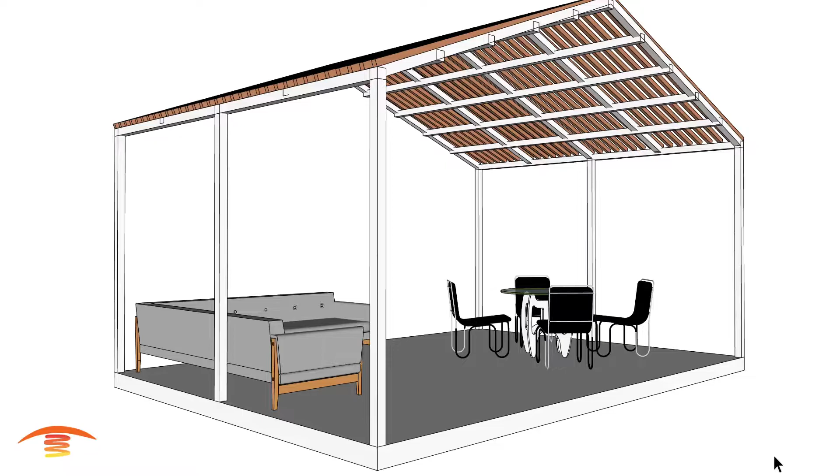Hi, this is Steve with Tropic Heating and PatioHeat.com, providing you with the visual concept of infrared patio heating. We specialize in sales, service, and designs for residential and commercial applications.

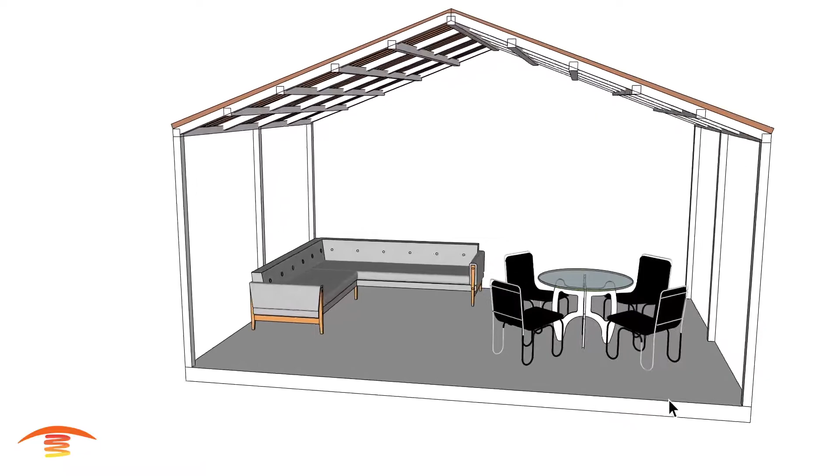Thank you. All right, so here's a standalone structure. This is a residential application. The only thing we have to really think about here is the fact that we have a wooden lattice up here. This is all steel frame, and as far as the seating goes, I just haphazardly placed a large sectional couch here and a table here for dining of 4.

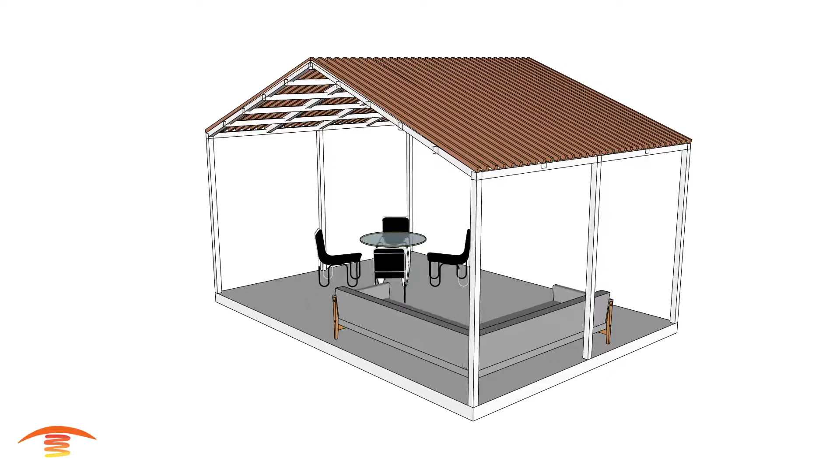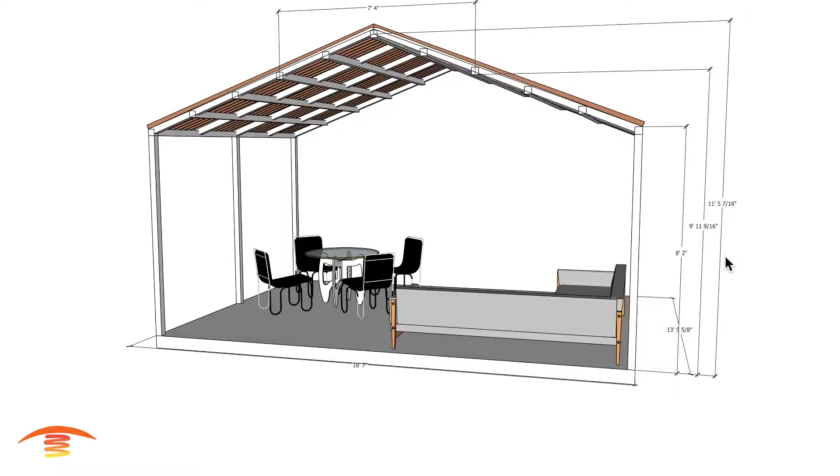All right, so let's go ahead and look at the overall dimensions. The dimensions here are 18 foot 7 inches this direction, and then a depth here of 13 foot 5 5/8. I have a height of the bottom edge here at 8'2", and then ceiling apex here of 11 foot, I believe that's 5 3/16, or 7/16 rather.

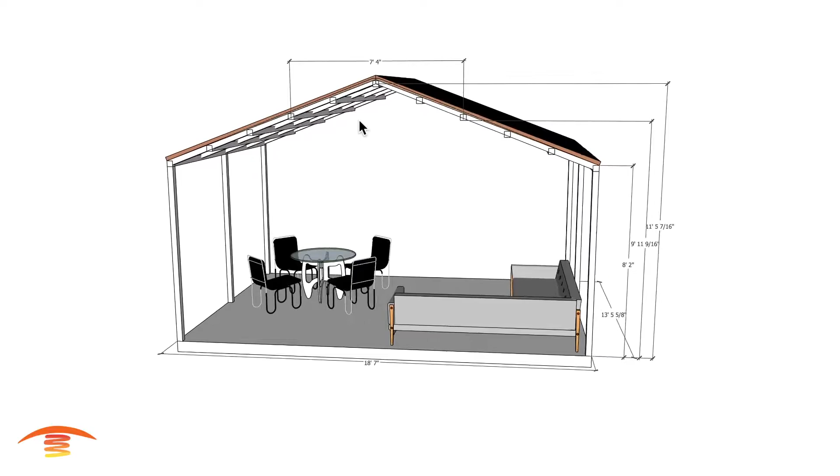And then I'm going to choose to mount on this particular truss here, I guess you would call it, and that is at 9'11". And also you can see here that those two outside matching trusses are at 7 foot 4 inches from center to center. All right, so let's go back here.

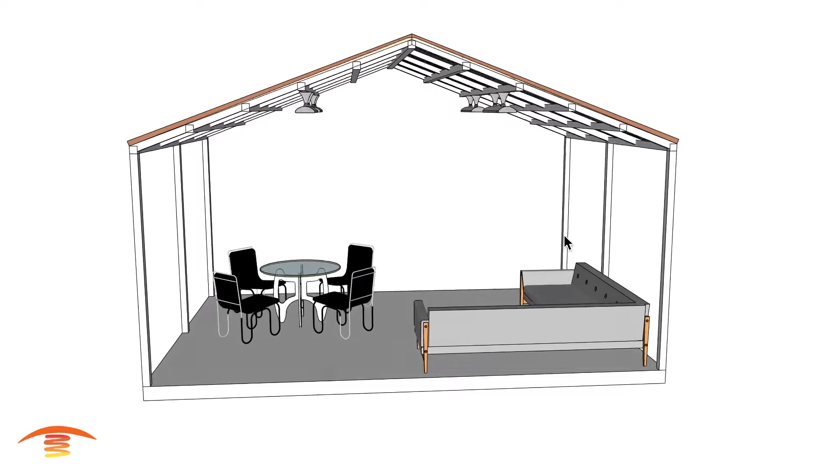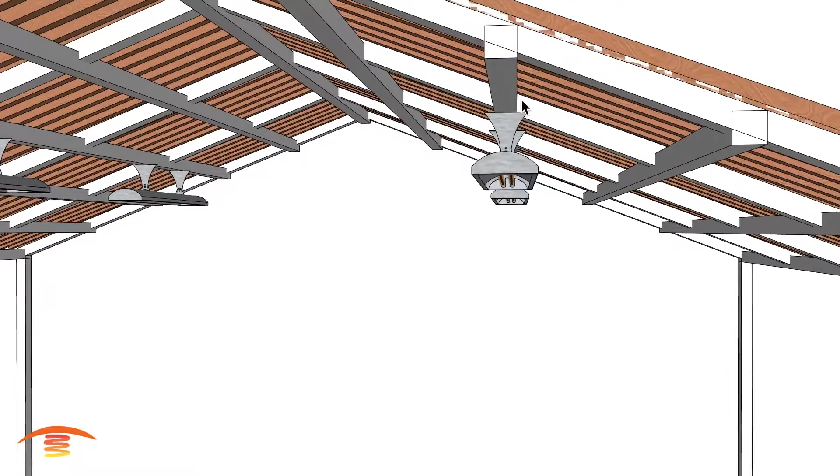I'm gonna have two different options. Option number 1 will be my preferred option. These are CD5024, so 5,000 watt 240 volt heaters, and you can see there's dual elements in them. I just have them mounted on this 3-inch square tube, and you could just manufacture your own type of bracket here. I know that this customer actually has some brackets on their drawing that would

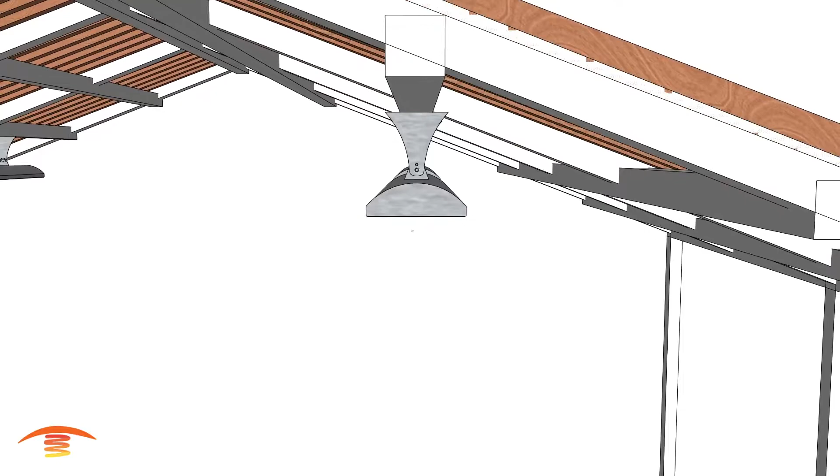be just a 90-degree, and then they could be mounted onto this portion here and then just drop down that 6 inches. Also, just to note that this bracket maintains a 6-inch clearance from this elevation, where the physical clearance is really 3 inches around, so you could actually make the bracket a little bit shorter.

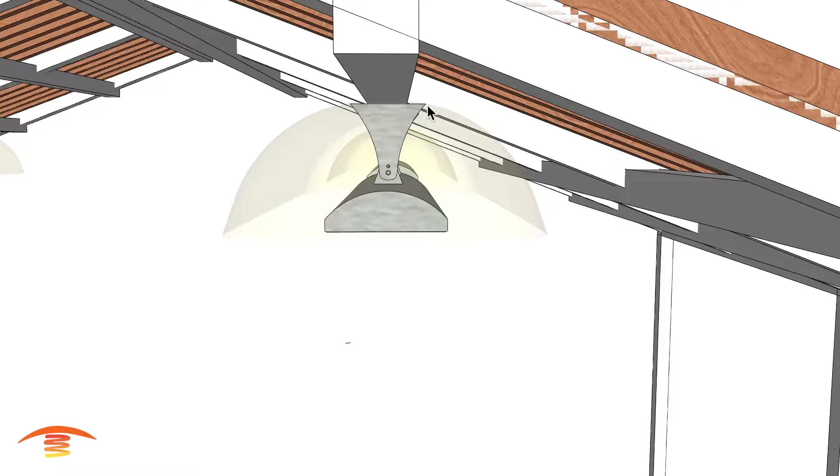Now there is a junction box back here, so you can't push them up too much higher, otherwise you're not going to get access to that junction box. But definitely either cutting this existing bracket, or making your own to match up with this 3-inch dimension here would be preferable in my view.

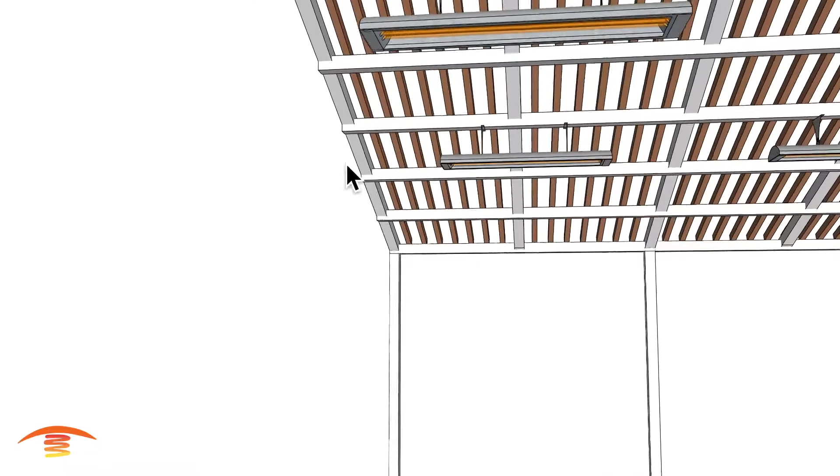And then also I have this edge of the heater at 2 feet off of this edge of the structure, and then same with this, 2 feet from this edge to this edge of the heater. And then of course just on these two structural beams here.

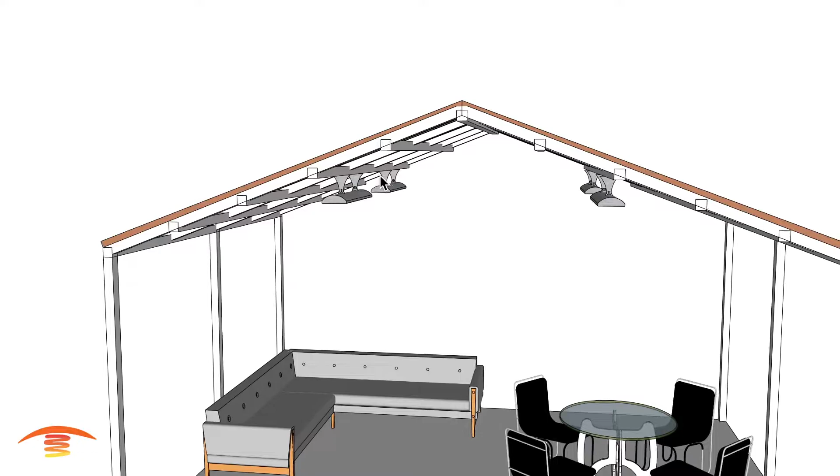Now these heaters are 18 pounds a piece. Actually, these are a little bit lighter than that. I think they're like 14 pounds a piece. So mounting on this shouldn't be a big issue with regards to the structural integrity. Just keep that in mind.

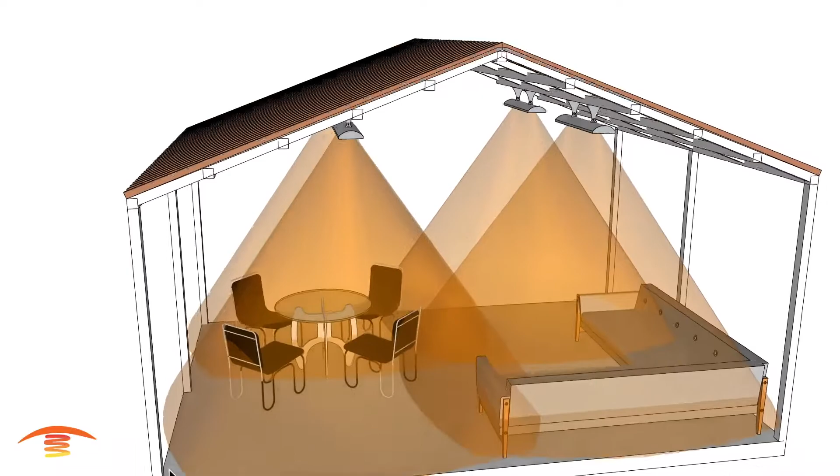And let's go ahead and look at the footprint of heat. Footprint of heat on an application like this, you can see that you're getting a pretty full coverage of the entire space. We're missing just a little bit of this outside edge here on these corners, but that's about it. And with the heater mounted at this elevation, the intensity is fine for this application unless you're in a very, very cold climate. You'd probably want a little bit more heat if you were.

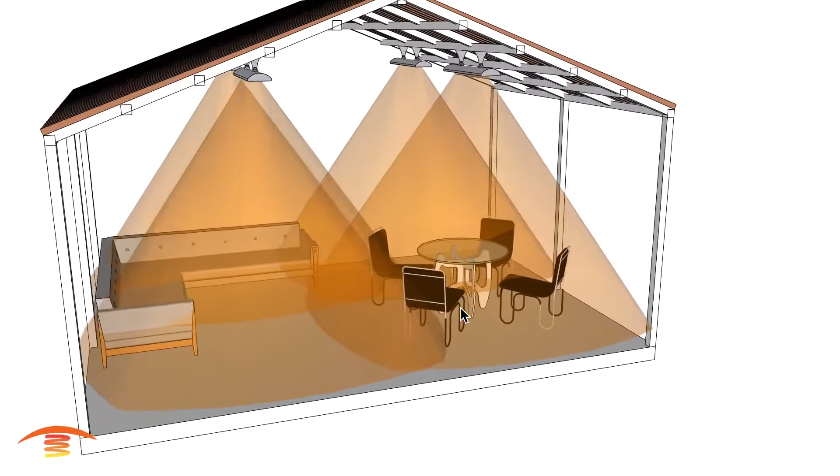But if this is somewhere in the moderate climate, let's say winters in the 50 degrees or above, that would be fine. All right, so that's option 1. Option 2 would be something of this nature.

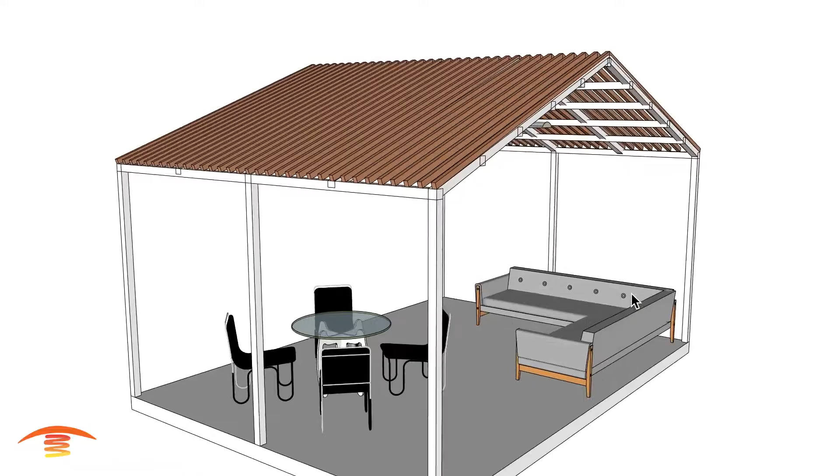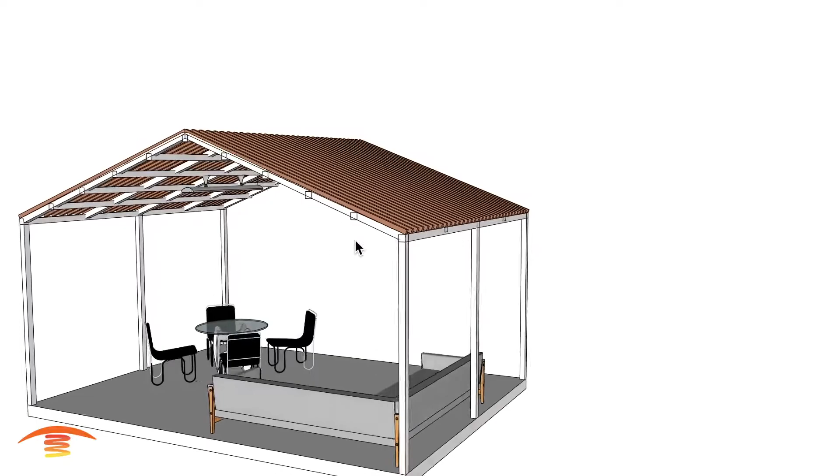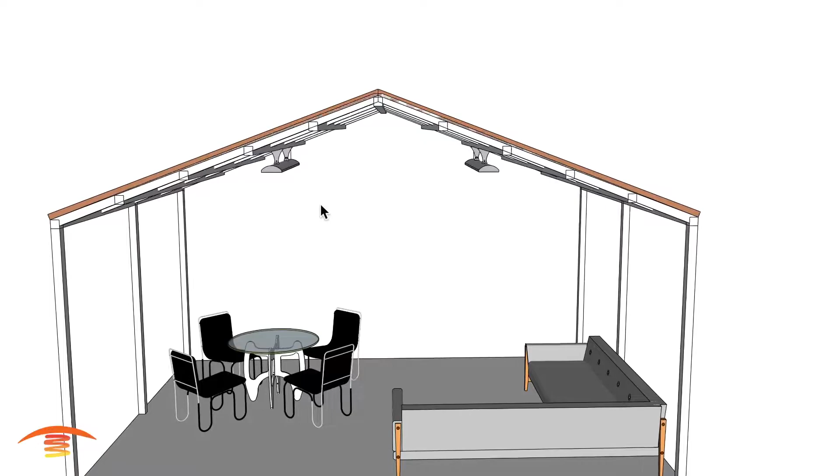So you'd take 2 of these, CD6024 6,000 watt 240 volt, and I just have them centered in the patio, and they're located in the same exact positions at 7'4" roughly. Now, if my dimensions aren't exactly right here, if it goes 7'5" or even up to 8 foot distance apart, that would be fine. There's no issue with that. 8 foot apart would be the maximum, and I'd want to step it closer if that was the case. So in any case, everything else would be the same.

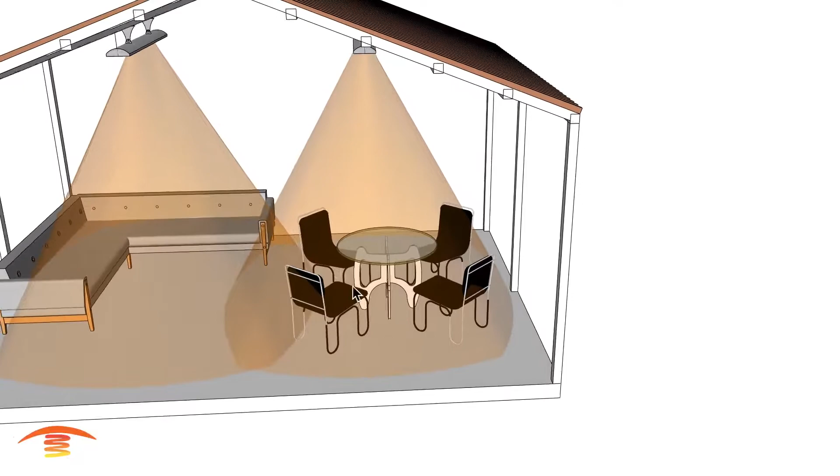Footprint of heat, you can see, is just a little bit less than optimal for the whole entire space. But let's say this customer is just going to have a dining table in the middle, and that is going to be it. Then in that case, these two 6,000 watt units would probably be fine for that application. Again, given that we're in a moderate winter climate here.

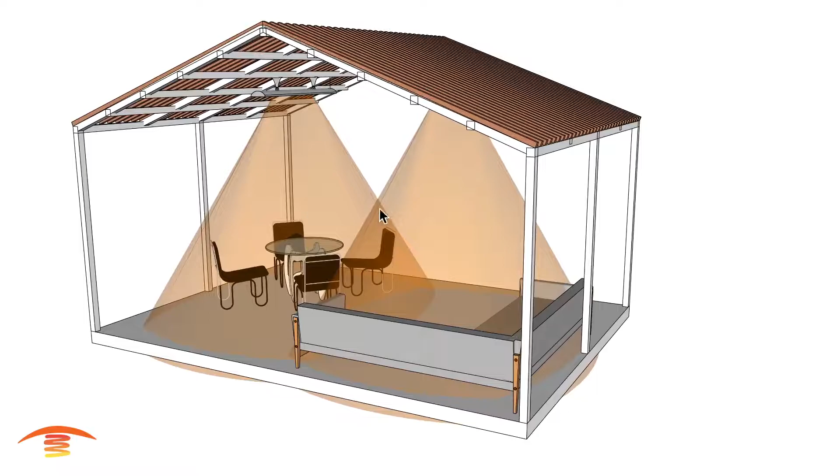So when you get down into the real low, let's say 30s and below, this is not going to be working for you. You need double the amount of heat to offset the coldness, and especially if there's a cold wind that comes through as well. But again, the moderate climates of 50 and above, this works just fine.